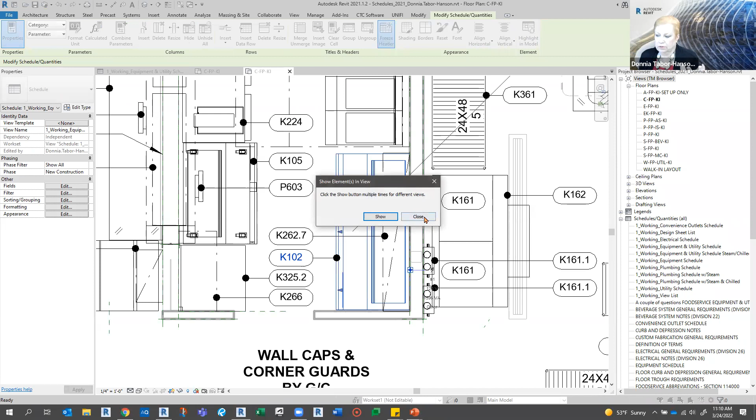That's my 102. Well, let's go see what the other one is by coming over here and picking this, highlight in model again. Goes over here, says, well, that's not a 102, that's a 103. Okay, great. So let's just type in here and say you are a 103. Problem fixed. And when we go back to the schedule and back to the sorting and grouping tab, and we do not itemize every instance, I now have a 102 and a 103 right here and here, and they're both showing up.

So that one is one that gets people, it's like, I put the information in there, but it's not showing up. Well, why is it not showing up? If there's conflicting information, and the fields are in here, and they are being sorted by the item. It's our item CFA number. It's our custom one for our chains. So they're being sorted by that type item number.

And yeah, if you've got conflicting information from that point on, you can put all of them in there as a K102, all of them go blank. That's when you have conflicting information, is when there are different things in there that conflict under that sorting there.

All right, what was my next? Oh, getting something either into or out of a schedule. When say it's not showing up in the schedule, or how do I get this out of the schedule? Well, that's when you use, oh, let me go back, wrong one. This tab. Okay. I'm going to go down here to this one. I've set something up here. So here I've got some things in the schedule that I don't need. So how do you get them out? Or how do you put something in? That's when you want to look at your filter tab. Your filter tab is what puts things in or out.

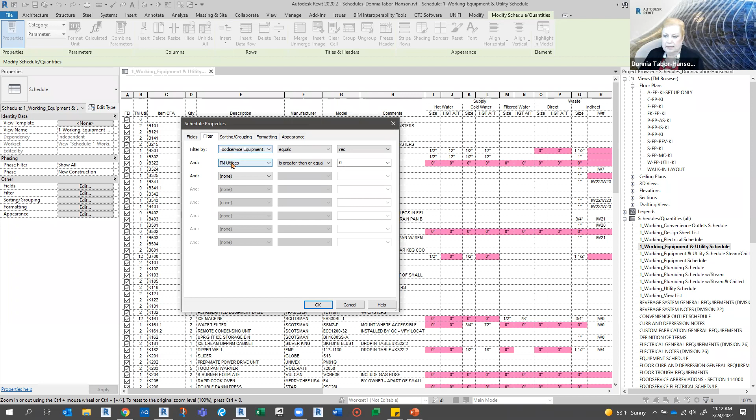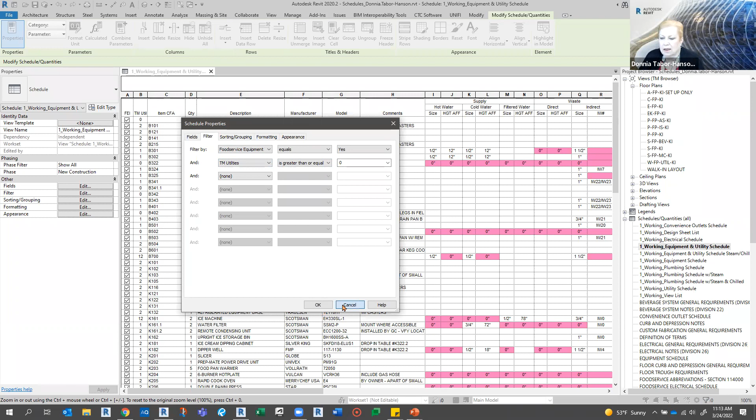And this one says if the food service equipment identifier, again, we're working in this, and yours could be whatever filter you have. But if that equals yes, and TM utilities, which we talked about, watch how much this one parameter can do. That was my workhorse parameter. And if it's equal to or greater than 0, then put it in here. Well, somebody put a duplex receptacle with the TM utilities of 0 and checked it. So it's got both of these in there. It's not supposed to have either.

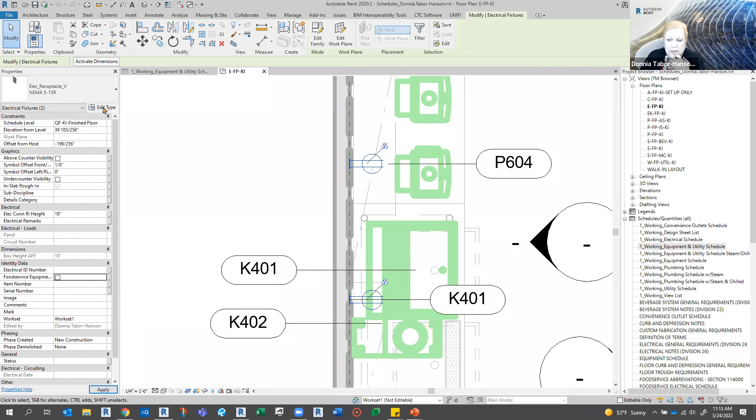Now I could either uncheck it or take the 0 out, but I'm going to go ahead and highlight in model and have it open it up, because I'm going to get them all at once. And it's got this, so I can right click and say select all instances in entire project. You do not need to show up in the equipment schedule. And where's your TM utilities? It should be a type. Why it got put to that, I don't know. But it's a 0. No, it's blank. So let's take it out of there. And that will remove it from a schedule. So you can use your filters to either put things in or take things out of your schedules.

Those are the 3 things that come up more than about anything else for me. And I answer those, especially those last 2, a couple times a month.

Okay, so there's my problem, children. Let's get into some things to make them work for us. We have working versus print schedules. Now, our working schedules, they're the ones that show up at the top of our list of schedules. They're the ones I want you to do your work in.

They're the ones I want you to go edit the information in. They're the ones I want you to go check and make sure everything is filled out, because whatever you do in there is reflected in the print schedules. And the print schedules are the ones that go on the sheets. So the working schedules are just for us. They can show all the information that I need.

Some of your filtered items, like my TM utilities, can be hidden in print, but they'll show up in working, like I showed you with that duplex. Yeah, so some of them may not have a print version. Some of my working schedules may just be for me. Case in point, I have a blog post, and I'm going to put the link to this blog post in our chat. I had a blog post recently about schedules and how to clean up your file.

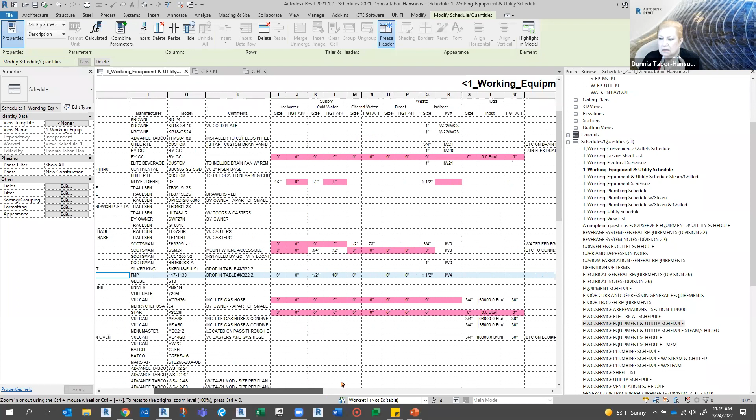So let's take a look at that over here. You can see that I've already got some combinations going on. These are the headers down here in this row. These have been combined here. Let me just copy this out. If I take this and say ungroup it, you see that goes back up there. If I take these two and join them, then I have the option of saying group. And I can put that in there.

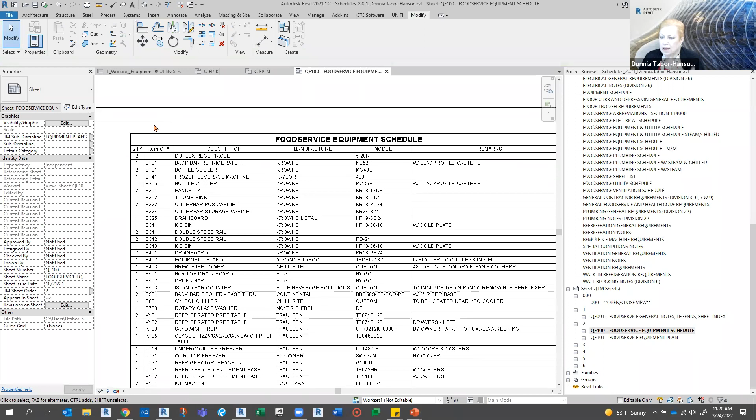I even grouped some groups and put another header on top of that, saying this is my supply and this is my waste. So you can even group or ungroup the headers. To group something that's not grouped, I would just select these and say group, and then you can type in whatever header you want. And it does show up on the prints. Let me go get, and I do pick the one that's not got groups on it. Let me go to my plumbing schedules.

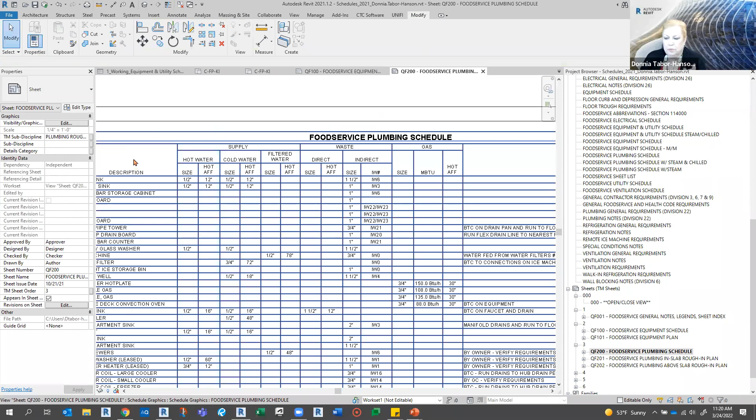When you get to a point, Donnia, we have a question. Okay, so here is the print version of that, and you can see it does make it look neater, so you can define what's where and how things are going. Okay. Do I assign view templates to schedules? Man, I started doing that and got in trouble. It seemed more trouble than it was worth, but yeah, you can make a view template.

And if you want to lock it down, it's harder for some people to figure out how to get to it. But I started doing that and realized that most of my guys don't touch my schedules that are in our templates. And if they need to and they do something wrong, the way we get it back is I'll delete the schedule out of here. When I create a template, I create a file called to steal from. So I've got a file to steal from, and I can insert my schedules from there by using insert from file.

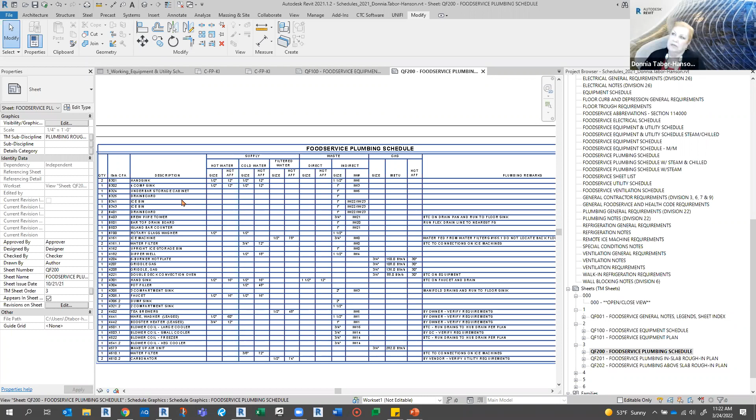Or I can transfer project standards for some things from that project. My to steal from project is something that's good. If they screw up a schedule, I can just go get it and bring it back in. So that's how I work with that. But yeah, I tried the view templates and it was more trouble than it was worth, even for me. I would forget, and it's like, oh, it's got a view template, I gotta take that off so I can edit it. So I just found it was more hassle than it was worth for me.

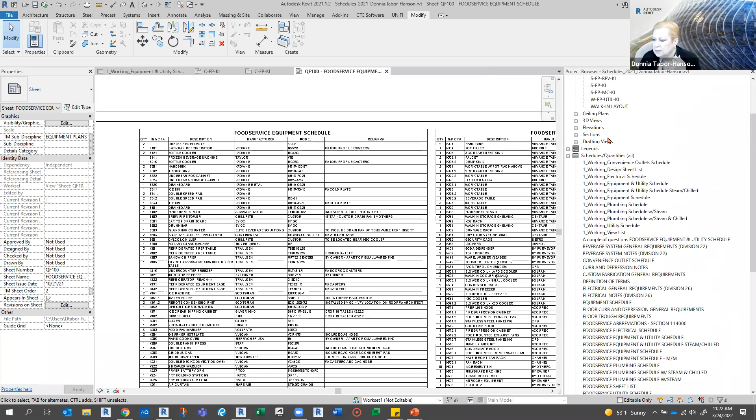But you may find that if you want to lock them down, that would be the way to do it, is put a view template on it. And just to show you where that would be, since it was mentioned, let's go back here to this one. Right here is view template. I even deleted them out of here, but you can just say, where's my create new? What am I in?

View template, none. I don't have a new in here. Oh, now I'm confused. I'll tell you what, I'm going to come back to that and post it in the chat, because I'm like, okay, where did it go? Because I should be able to do this. I do it with architectural, nothing. Do with all, nothing. I don't have a new here. I'll come back to that. I know I've had them, but I just can't get it right now. So I will come back to it. I'm not going to let it slow us down today. But thank you for asking.

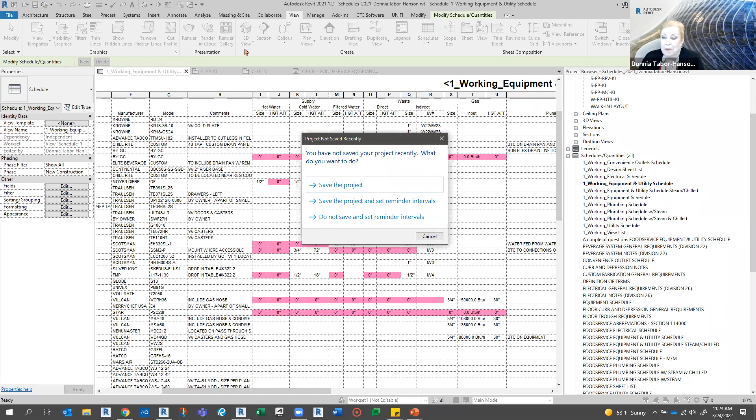David offered up, I think, a tip on that one. That is only to assign one. View tab on ribbon to create. Oh, okay. Yeah, well, that makes sense. And I didn't realize you couldn't do it here, because it looked like you want to do it here. You do others like that. But yeah, when you go here, you see, I went straight to view templates. You can go in and the dialog box comes up and you can get them from here. But see, this just gives me view templates for all.

We can go architectural. See, I'm not seeing schedules here. I'm gonna come back to that. And David, if you want to put a message in there on how it's done, because I can't see it right now. I don't want to waste more time on it at this point. We will get you an answer. We'll take care of that.

Not a problem. I don't mind being stumped. Somebody just got kudos for stumping Donnia, right? So

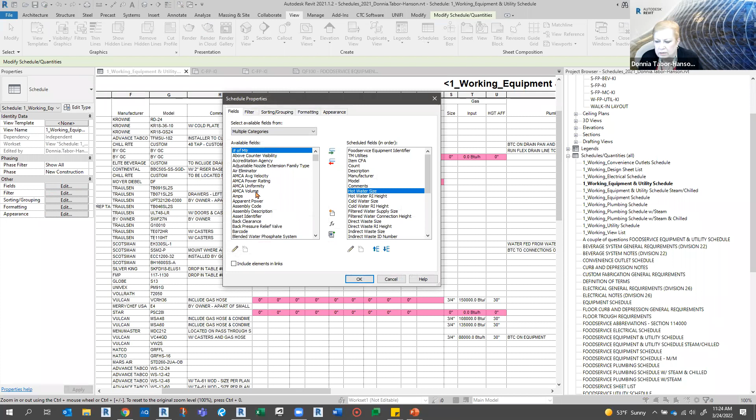Be careful if you add columns after your group, because it will not automatically put them in a group. It will split the group. I showed you how to ungroup and then you can regroup. So your grouping will have to be redone if you do add a column in between. And just to show you how that is done and what happens, if I come in here to fields and go somewhere in here and I'm going to add just anything and put it in there, and see, it splits.

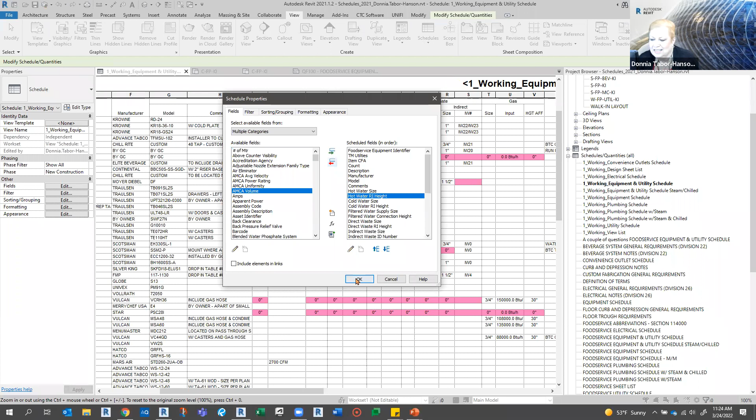So if I go back and take out AMCA volume, and take it out, I'm still grouped there. So if you want to do groups, it's best to have all your columns in to begin with. Okay.

Now, y'all notice some pink boxes in there? Our family templates have more parameters sometimes than are necessary, and often they have zero information or information not filled in. And so we set it up so that when we go into something like here, this says it's hot water, cold water, all of these are zeros. And I'm like, what in the world has the drunk bar? Now you're curious, aren't you?

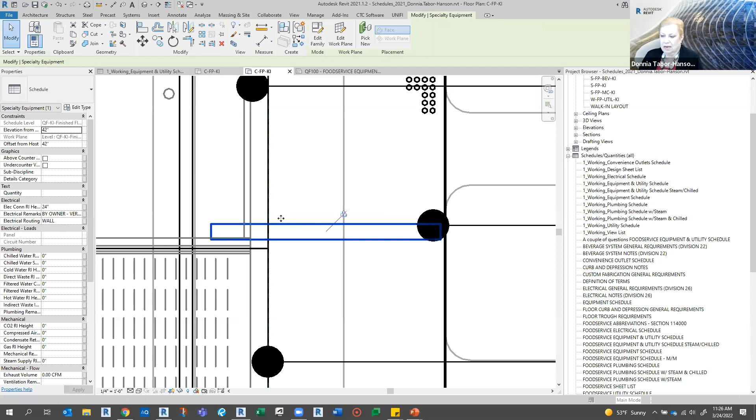Let's go get this and highlight model. I know you want to see what the drunk bar is because this is a restaurant. That's what we do. So the drunk bar is a bar. It is on the top of, this is where the bartenders will set the drinks. And they have a bar here. So the drinks will come out on this side and the glasses will come in on this side. The glasses that are drunk from go on one side of the drunk bar. But I think that's funny. That cracked me up when I found that.

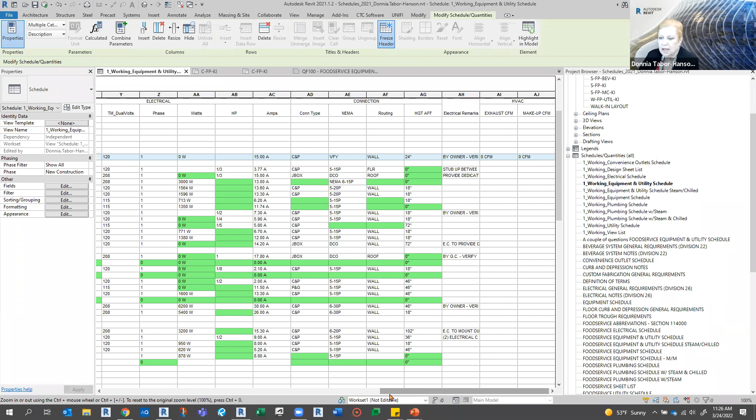So the drunk bar shouldn't have any utilities whatsoever. So apparently the wrong template was used, because if I look, he's got every utility. Somebody has used something else because he's got a 24-inch height with wall verified. This isn't right. There's a family that needs editing. And here this is green. When we have missing information and we want it to show up, that one's got something in it, but it's wrong. It's got a 0 in it.

We have done what is known as conditional formatting for highlighting zeros and blanks. Our zeros and blanks are things where we want to make sure, like you're missing information here or something's not right, so that it prompts our team members to go in and look for those. It especially comes in handy when you've got indirect waste and you need an indirect waste number to show up.

So if a blank is there, the conditional formatting is done under format. And I'll just use that one as an example. Let's go down and get indirect waste number. Conditional formatting is done here. The conditional formatting for this one: if indirect waste is equal to blank, color it pink. So you just pick your own color. You set your own formatting and set it up so that it highlights in there.

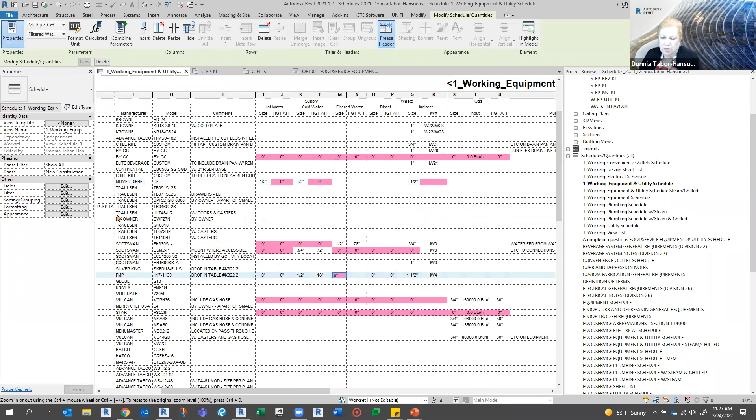And if it should have some information, like if this says 0, well, the conditional formatting for those would be, I'm picking one of these sizes that have an inch mark, if this equals 0, then put it pink. In the electrical, we choose green for missing information, because our view templates are set up so that anything using that TM utilities, 1 is plumbing, 2 is electrical, 3 is mechanical, which is the blue.

So some things will have plumbing and electrical; their TM utilities would have a 1 and a 2, such as this ice machine right here. It has a 1 and a 2. So it goes into both schedules, because our electrical schedule says TM utilities contains 2. So we also put the same colors in here as we do in our working views to let people know if it's green, put electrical with it.

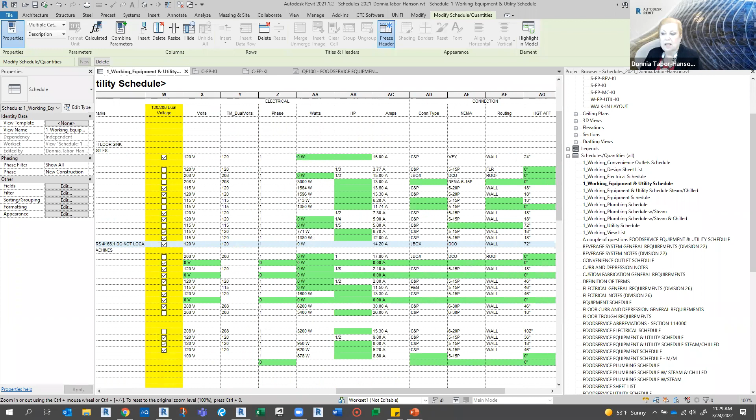And this is also to let you know you either got missing information or there's too much information in that family, which some of it should have been moved out. So that's how you can use conditional formatting to get things to prompt you to fill out information.

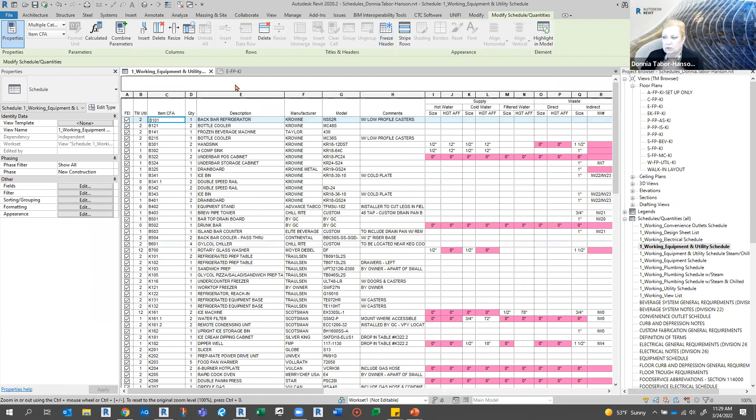All right, now highlighting rows or columns. In 2020 and before, there was a stripe rows. It was so simple. I will pop over here. I was in 2021, now I'm in 2020. If you wanted to stripe your rows, you just had it right there. Stripe your rows. And it automatically has the stripes. Every other row has a stripe to it.

In 2021, there is no stripe rows. They took it away. No, they put it under your appearance because they gave you a little more control. So in 2021, those options have been removed from where it was, but it's been replaced inside the dialog box under the formatting tab. Did I say formatting tab? I think it's appearance tab. It's under the appearance tab. Of course, I got that wrong. So you can tell it to stripe rows, and then you can choose your colors.

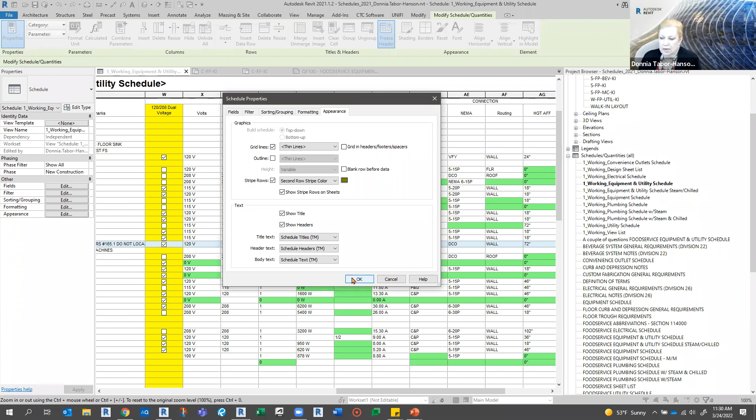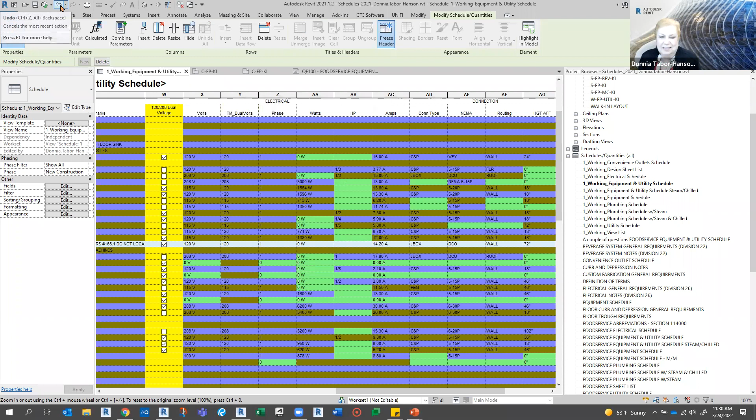And I'm going to say purple, and then I can pick the second row and make it, I don't know, some ugly green. When I have conditional formatting, my conditional formatting stays. That's ugly. Conditional formatting overrides anything when you do something like that for your stripe rows. Yeah, let's get that out of there.

But if you want to do the colors, I'm waiting for them to come out where we can stripe like 5 rows at a time, because it has been studied that the human eye can follow a row of 5 and keep your space, whether you're top, middle, next to the top, next to the bottom, and follow that line better. That's why a lot of times when you see some charts, they'll do it in groups of 5 colorings. I'm waiting for that.

All right. Now, there is a way to highlight one row at a time and to determine its color. And I found that, and I'm going to show it to you on a web page. I'm not going to do it here, but we're going to look at the steps.

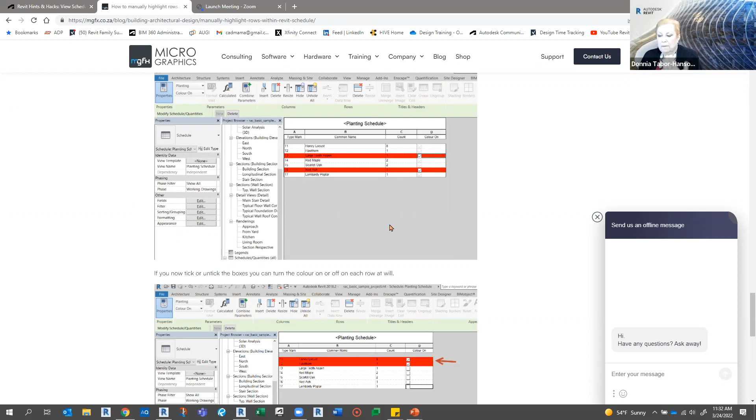So he was doing the same conditional statements that I was doing, but to get it to do the entire row, he has to go into each individual column and say, I want it on this one and this one and this one. Where I was doing it for one column to do this, one column to that. But that is a way, if you want to have colored rows, you can do a colored row.

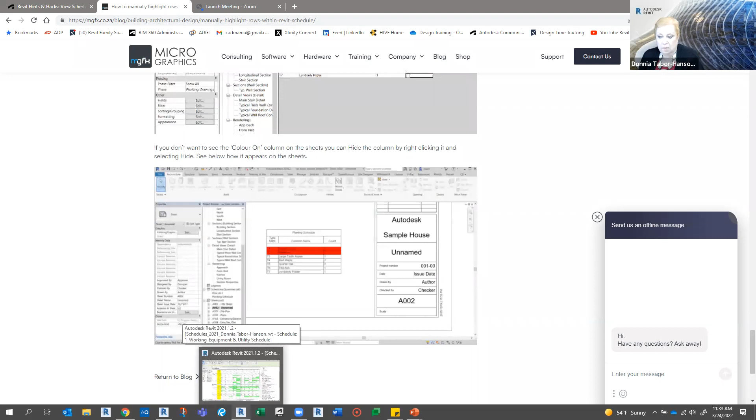Your conditional formatting will eliminate any conditional formatting like I've done with the pinks and stuff. But if you want to do it in your print schedules, you could do it to highlight something. And he shows that it does come out on the schedule. So I didn't want to go through those steps because it was just too easy to come here and point this out and show you that one. Plus, it's something that I won't be doing on mine because we're doing the conditional statements here.

Now, if you want to highlight a header, it's on the contextual menu. So you can come up in here and pick on this, and then you have shading. And if I go to shading there, I could go with all pink. On that one, no, just the header, just the one. So it's just one at a time. If that's what you want to do, you can.

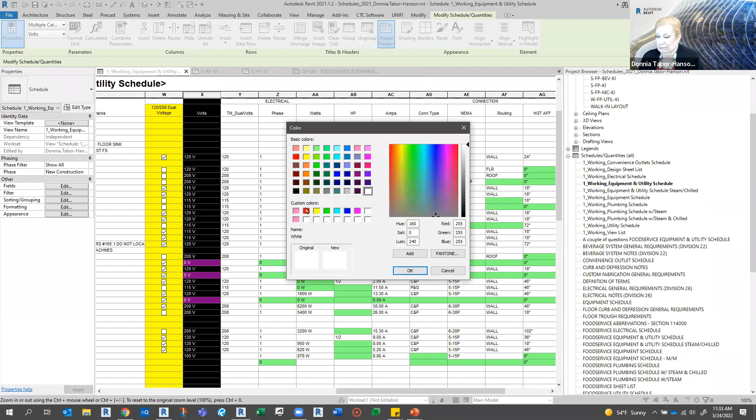If you want to do a column, you can do a column and you can do shading. And if I go do shading in it, notice it did the column but didn't get the header that was combined. But you can, and see, my conditional statements do override this. So you can do columns if you want to. That option is available to you.

Which I keep on doing these things. So yeah, to highlight a column, it's in the contextual menu. Contextual menus meaning when you select something, you look up there, and whatever is in context of what you selected is going to be chosen.

Okay, no zero lengths. Now in my working schedule, I've got all these zeros showing up. You don't want that in your print schedule. So you don't want a zero in your cold water size. We got cold water, but we're just not going to give you any size for it. That's going to be fun.

Since your schedules reside only in projects, we use project parameters for removing zeros. That way I also don't have to edit my shared parameter file. And if you've been following along, you may figure out I don't like anybody editing a shared parameter file. So this was done with project parameters. And we have several things that we can do. We go in there and replace them with something, but it depends on the parameter with the zero as to which project parameter we use, or a blank.

And some of ours that we use have to do with our equipment having electrical and plumbing and such. These are our empty ones, it's called empty amps, and it's project parameters that we assign. They have no value assigned to them whatsoever. They're empty. I have amps, gas, length. Length can cover your size for your gas, size for your hot water, or its rough-in height. They're both lengths. Anything that has an inch mark can be a length. Also can cover phasing, volts, and wattage.

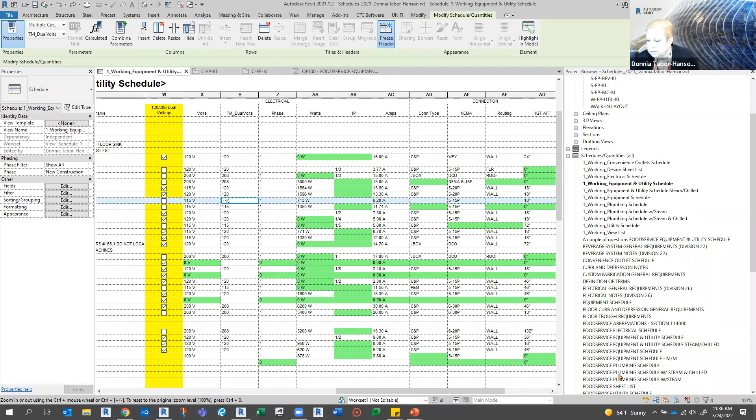So let's go look at how we have accomplished that in our print schedule. So I'm going to go down to, let's see, I've been working on equipment. Did I leave that open? No, of course I wouldn't have done that. Here's my equipment and utility schedule. So in here, it takes a lot of duplication work. For ours, it took a lot of duplication work because we have an equipment and utility schedule, which has all the utilities. And then we have an electrical schedule, and then we have a plumbing schedule.

So I did the utility schedule, and then for the electrical, I would just delete all the plumbing out. Duplicate this utility schedule and delete all the electrical out, and I got my plumbing schedule, because it does take a lot of work and a lot of extra fields in here because we have duplicated our fields.

So here's the hot water size parameter, but here's HW size. When I go look at formatting, hot water size is our parameter. It's hidden, but HW size has a heading of just size right here. But HW size isn't a parameter. If I go here and pick on HW size, it's a calculated value. HW size has to have parameters that are already in the schedule if you're going to use it.

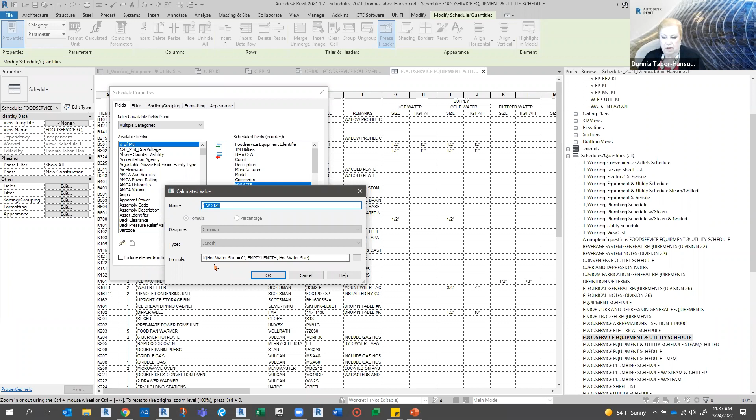So if hot water size equals 0, use empty length. Empty length also has to be in the schedule, hidden field again. Else use hot water size. So if hot water size comes in with 0, it's going to use empty length, and empty length is set to blank. Else, if it's got hot water size, it's going to use hot water size. So therefore, I have eliminated all of those zeros in here.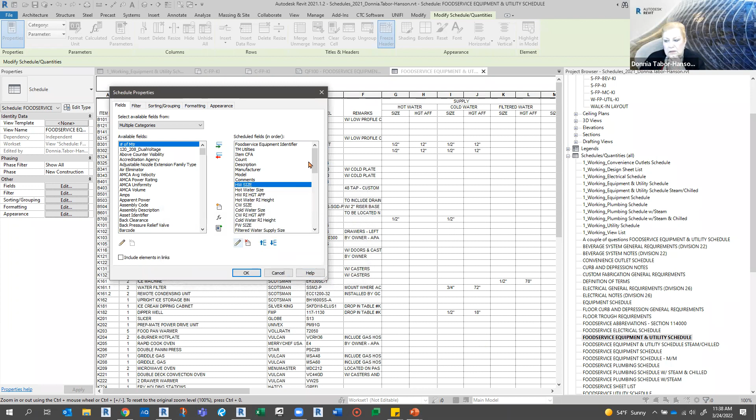So just look down here. Here is all of our empty length. These are set under formatting to be hidden fields. They don't show up, but their values are used to replace any zeros or blank fields so that they don't show up when we don't need them. And it just made it a lot cleaner. Before we did this, there were a lot of zeros still showing up, and if you send that to an MEP guy, they're going to go, what? Red marks everywhere. So to keep the bleeding from happening, we removed all the zeros.

Donnia, when you get a moment, we do have a backlog. Oh, okay. What you got? Let's see. I hope I'm saying it right.

Mylan said, maybe out of topic, but my team needed a fast solution to schedule an electrical fixture family with survey coordinates. What I did was insert a site category family into the electrical lighting to schedule it all fast. It worked, but do you have a more intelligent solution? No, because you're going to need something that has survey information in it, and the electrical doesn't have survey information. So that is the optimal way of doing that. Just nest it in there. That way, everywhere the electric goes, it carries that little survey thing with it. Yes, perfect.

Paul asks, is it possible to get more than one conditional color in a column, such as fire ratings on doors within a door schedule? 30-minute red, 60-minute blue, 120-minute yellow. I don't believe so at this time, because you only have the one condition and I don't have an or in there. If we had an or in there, hey, wish list. Is the Revit team listening?

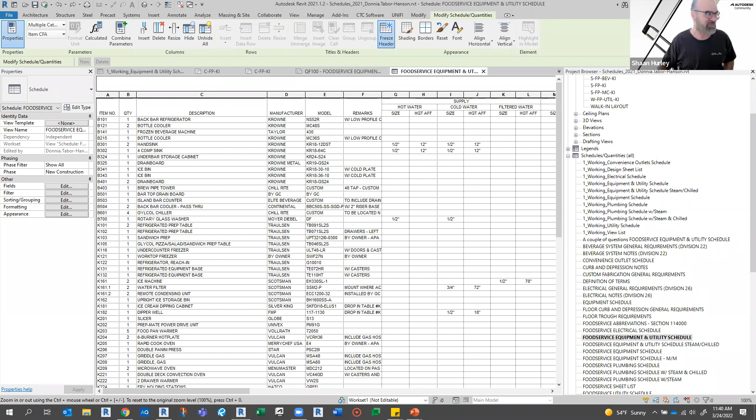Okay, is that it? Yeah, Katie came in with a good one: if you're working on a door schedule and the glazing dimensions are equal to 0, how can all those zeros be hidden, or just those instances? And then she goes, oh, I asked too soon, because that was when you hit that. So yes. Okay, perfect. Thank you.

Okay, I'm looking at my time. Let's drop to a key schedule. I don't know if anybody's ever made a key schedule. This is the simplest thing in the world to do, and it's for when you have something that's going to be repeating. You start a new schedule and you choose the category of key schedule. I've got like 3 notes here, and then we're gonna jump over and do it real quick. Select the schedule keys for the type. We're gonna do a room key schedule, which is typical. Doors are great for key schedules so that you can pick which type of,

What, people are drawing on my things. Can you block them from drawing?

Okay, so doors are great if you want to do the hardware. We're going to have a kick plate, which type of hardware it's going to have. You can do a great key schedule for that also. And after the key schedule is made, you can then add the key schedule to it. And the key name can be hidden if needed.

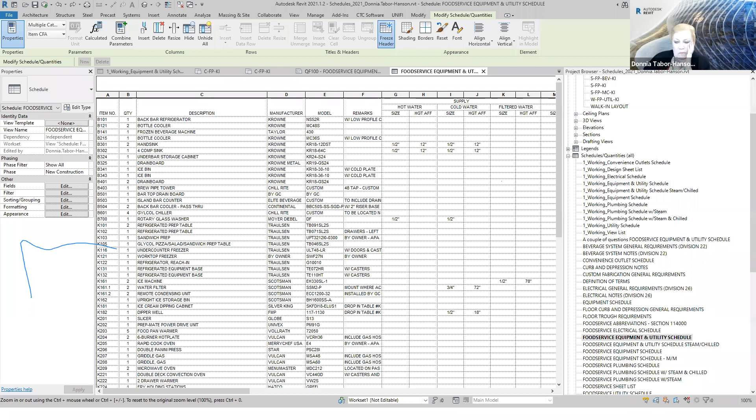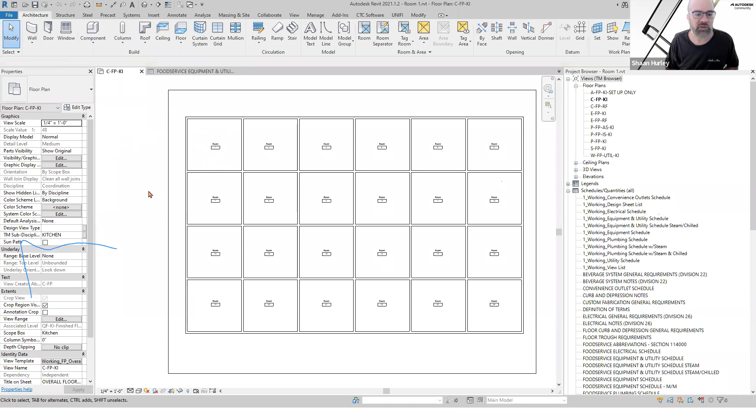We're going to a key schedule. So I'm going to go up, and schedules are under views. And I'm going to say schedule. And when the schedule comes up, it won't let me select this until I go down to something that can have a key schedule, such as rooms. Select key schedule. I'm going to call it room type

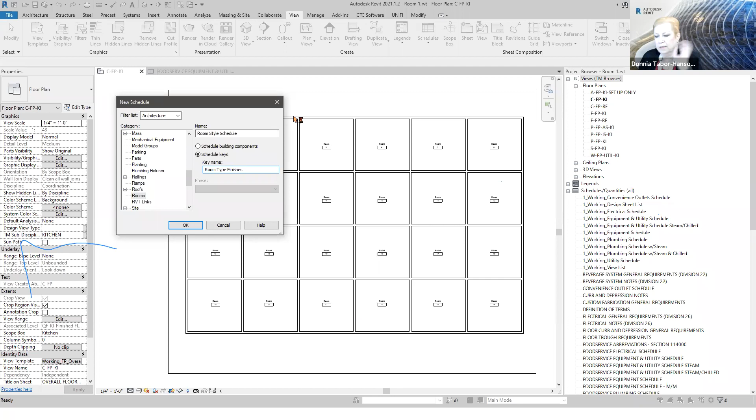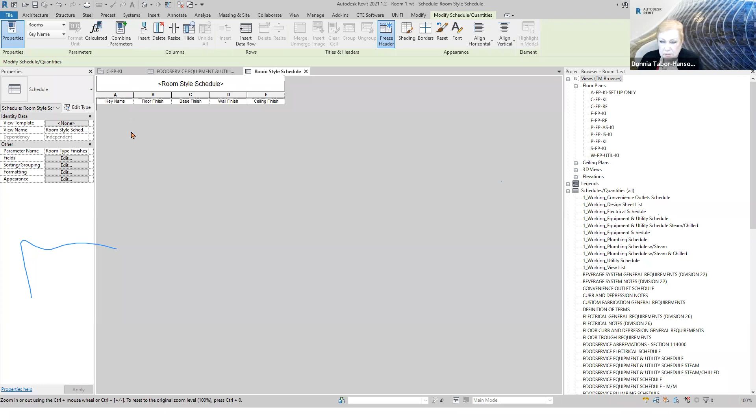finishes. Okay. In here, let's start with a floor. I need a floor finish. Going up, I need a base finish. Next, I would need a wall finish and a ceiling finish. So now I've got a key schedule. And I need to add some rows here so I can fill them out. So I'm going to insert data rows. 1, 2, 3, 4. Let's do 4.

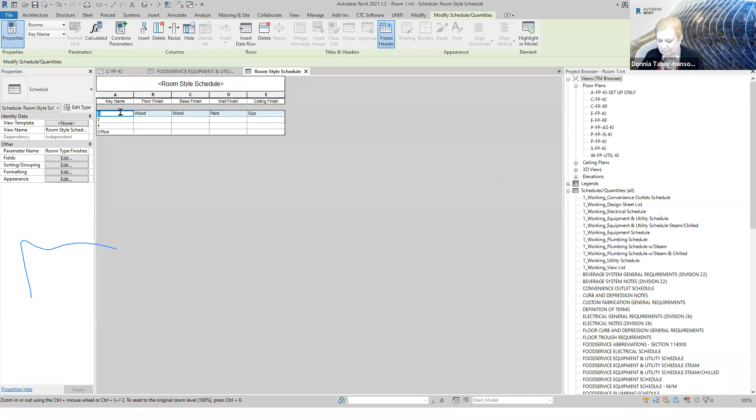And let's say if I'm in an office, I have a wood floor, wood base, paint, and gyp. And that just went to, oh, office went down there. Okay, I'm going to change this to something else. Can't spell. Okay, we're going to leave it. We don't care. We're going to say storage room.

Can they still see? Because all of a sudden I've got Shaun over here, big time. Yeah, you might need to hit share again. I was trying to get rid of the draw thing. I dropped your share out. That's what happens. I broke it. All I have been doing is typing in the schedule, and y'all didn't see me type and misspell.

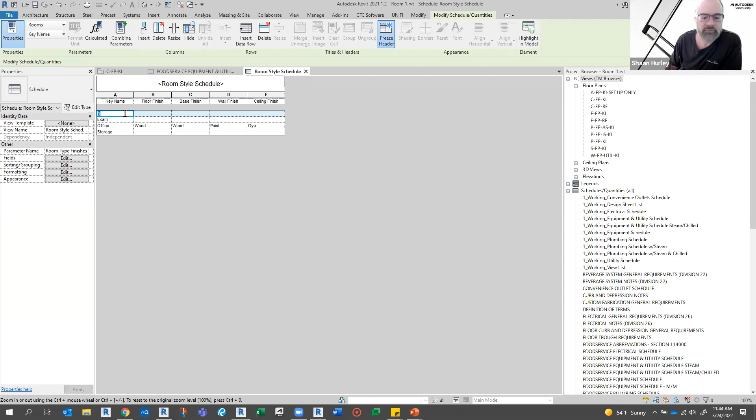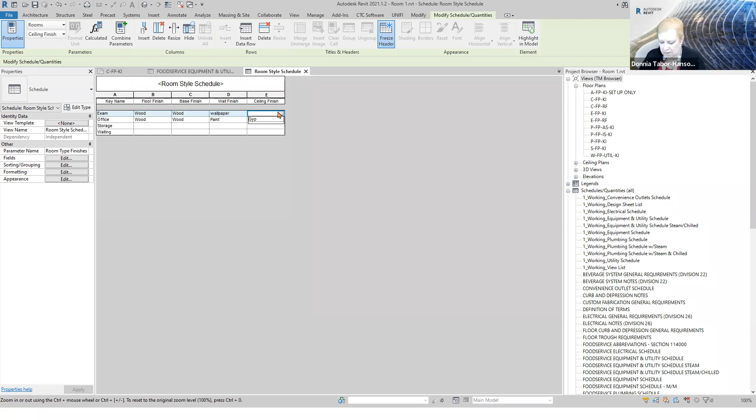I'm leaving it anyway. So I've got an exam room, an office, and a waiting room. We did get rid of the annotation though. Now, the exam room is also going to have wood, and it's going to have wood, but here it's going to have wallpaper. Can't spell. And the ceiling's also going to be gyp.

The storage room will have acoustical. It's going to have paint. It will have vinyl base and tile. Boom. Okay, let's make the exam room with tile and vinyl. But then, once we get them typed in there, you see we can just go pick on and make that wood, make it wallpaper and gyp. So we've got 4 different room types.

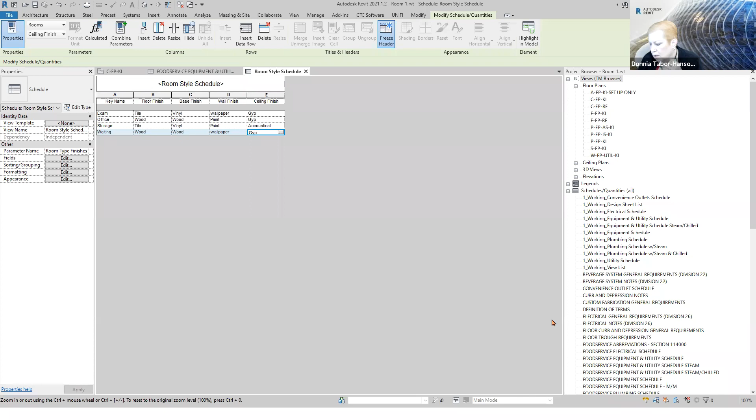So now when I go to my room finish schedule, I can go in here and now I have that room type finishes that I made as a parameter that I can put in here. So I'll put it in and then I can come over here, and this room, I'm not going to fill out all this other stuff. All I have to do is fill out which type of room it is to fill out that schedule. And I can change it at any time and say, you know, you're this or you're that.

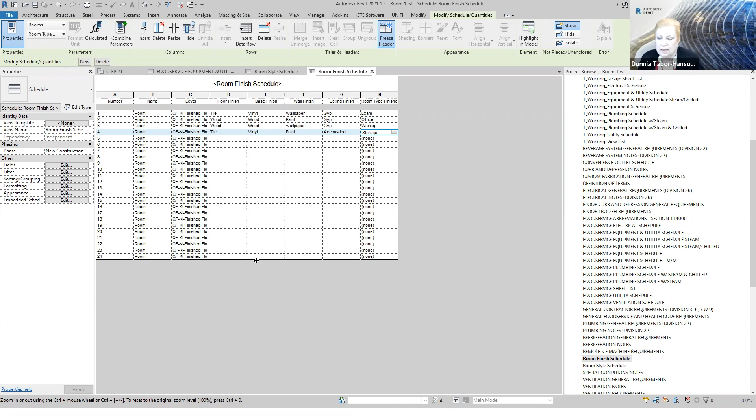So you can see how a key schedule, if filled out, can go in and fill out the other schedules for you. It's a very simple way of getting that in there. And then I can come back in under formatting. I probably don't want to have this one show up, so I'll just hide him. So then I can have my finishes already coming in. Better spelling, all uppercase, you can do all kinds of things better. This is quick. So that's a key schedule. It's a real simple method of doing things. Do we have any questions on this?

Does not appear to be, other than Chris making fun of me blowing away your share screen.

Chris got my back. Okay. Back to, I think we're going to get through everything. I was wondering if I was going to have to blog about this last one instead of just going through it.

Okay, schedule hijacks. Some of the things that we schedule or use schedules for, number one, notes. I love it for notes because I like the way it formats better than using text. I can line things up better, and let me show you a sheet. Let's go. Yeah, I got a lot of schedules. You're going to see why right about here.

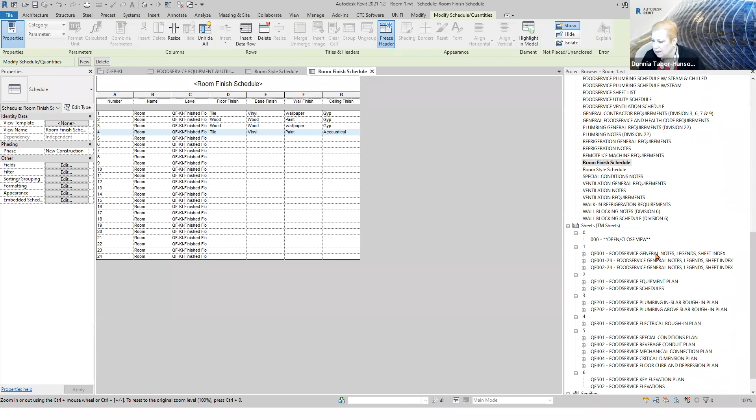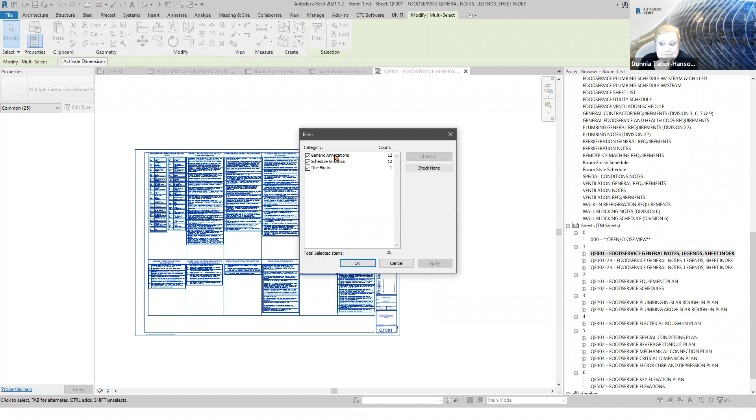This general notes and legends page. If I just do a crossing window here, under my filter, I've got one title block, 12 schedules and 12 generic annotations. I like things nice and tight and clean lines wherever possible.

We have a generic annotation, this is a bonus here, that we can give whatever name it needs to have, and we can give it whatever size it needs to have, and we can line them up here and fill in information. Everything else in here besides these things and the title block are schedules. These are all schedules.

This is great because in a schedule, I can go into my formatting and I can set whether my formatting is going to be left or right, and I can do that easier. I can go into the appearance and set anything I need up in there, the correct text and everything. But I like it because I can take this schedule right here, bring it over here, and break it in half if need be.

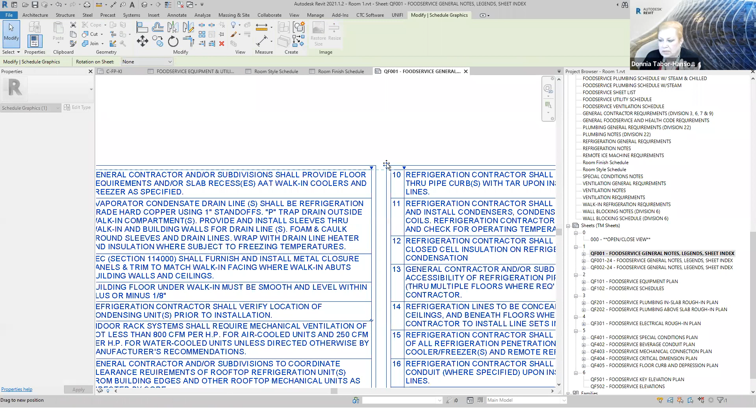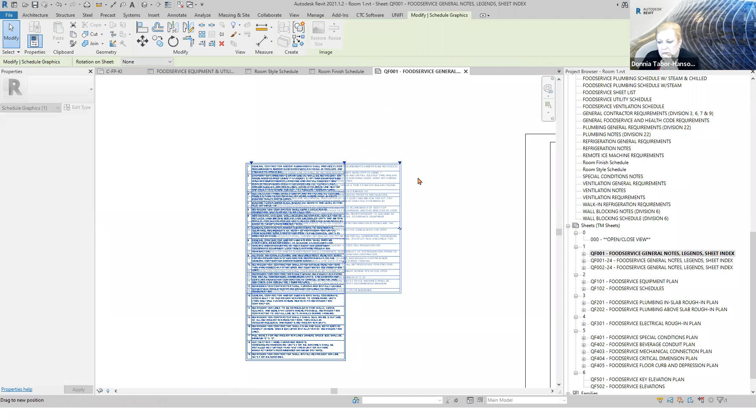People always ask, how do you put it back together? You have to pick on the little move button, and just drop it in the middle. It puts it back together. It's an easy thing, but that one seems to be tricky until you zoom in and get that move thing. But I can also take it and make this wider. This to me works a lot easier than working with text in there.

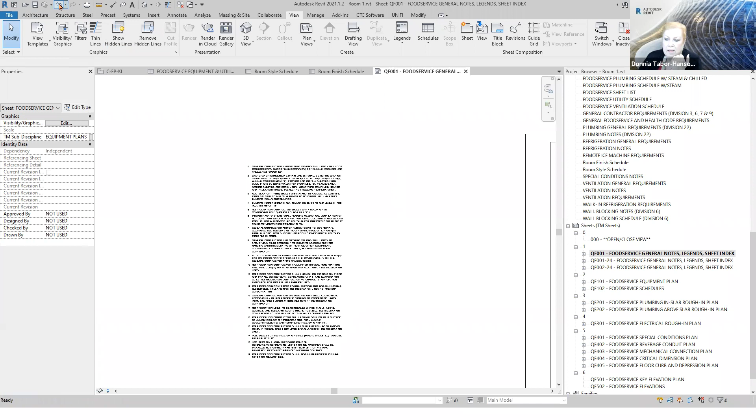So I can go in there and make all of these text and put it back where it goes. The nice one is this one right here. When I open up this schedule, my abbreviations, all I had to do is copy them in here and just set the right justifications. And the beauty of that is I can put it on any project I need.

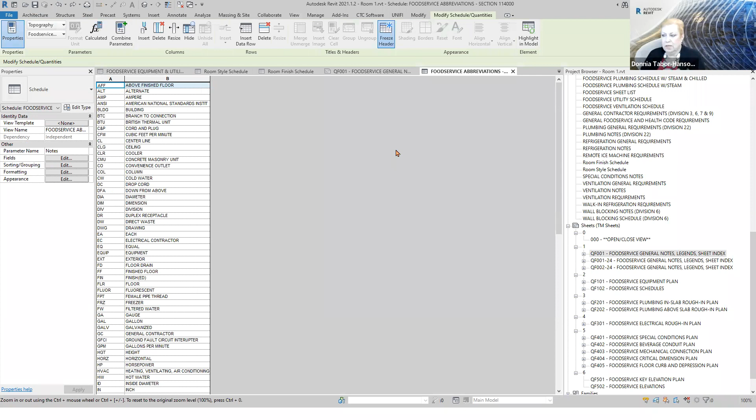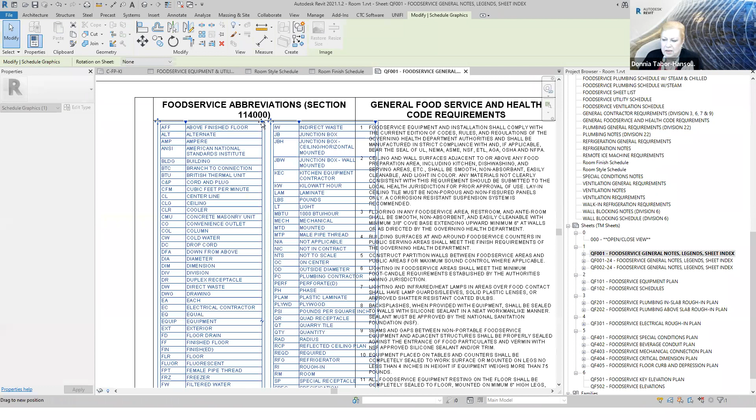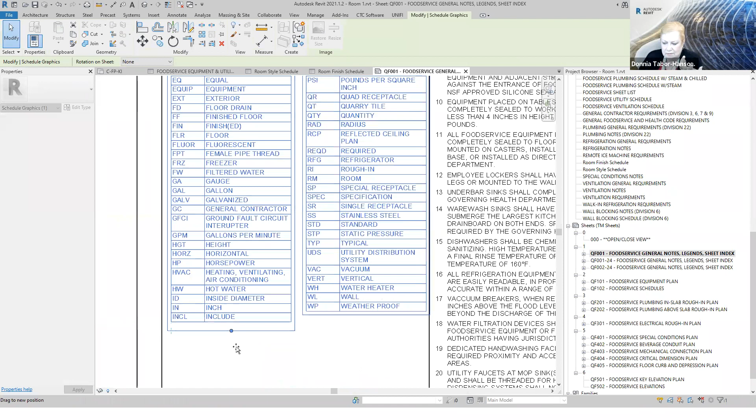And because I can break it up like you can a schedule, which you can't in text, I can make this any size I need to make sure that it fits in. And if you move one, you're going to move the other. I've got it where it fits in where it needs to be just by breaking it. And you can, of course, move these up and down to adjust them, however you need to move them.

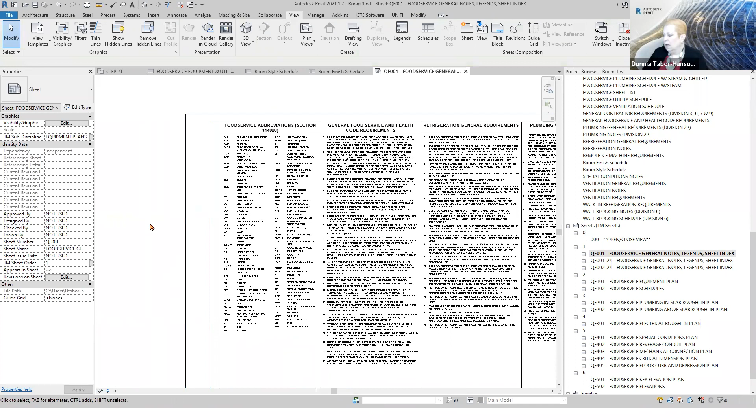That's one of the things I love about schedules, being able to do whatever I need to do with it, to get it either text or to get my working schedules, where it gives me so much information and it gives my team members a lot of feedback. Oh, I'm in a blank project here. It gives my team members a chance to go in and work with those so that they have feedback given to them from the schedule.

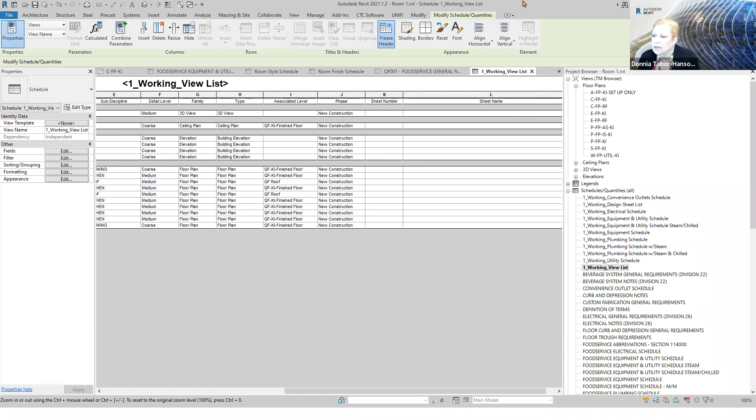I mentioned the view list in my blog post. This is my view list. You can see I've got a lot of things in it, and we've got a minute or two, so I'm gonna go back over it. Working views and such. So if I'm not in a project, let me pop over.

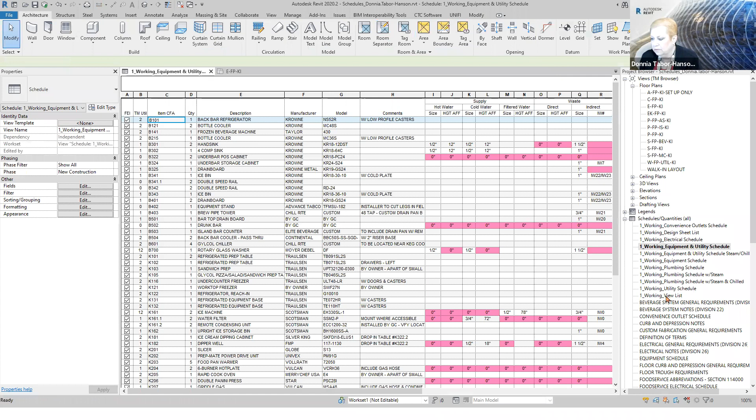We are getting some questions. This is now 2020, and it is in a project. So here's a view list of an active project going on, and you can see there's a lot more in here. We preset some of our views. Our views don't have their names on them; that's going to be on the sheets. We have these set up for our coordination, our electrical, our elevation key, our plumbing above slab or plumbing in slab.

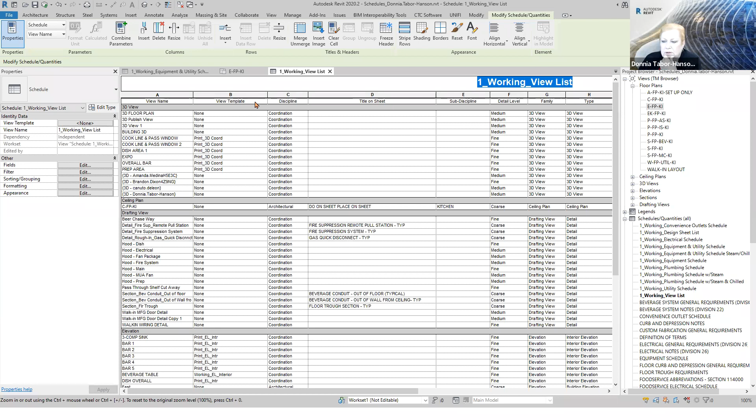So we have a code for these that we give everybody when they start, so they know what these are. But then each of these will have a title on sheet. But it's nice to come in here and go, well, it also has, let's see, it has a view template. Now here comes up something I don't think I even mentioned.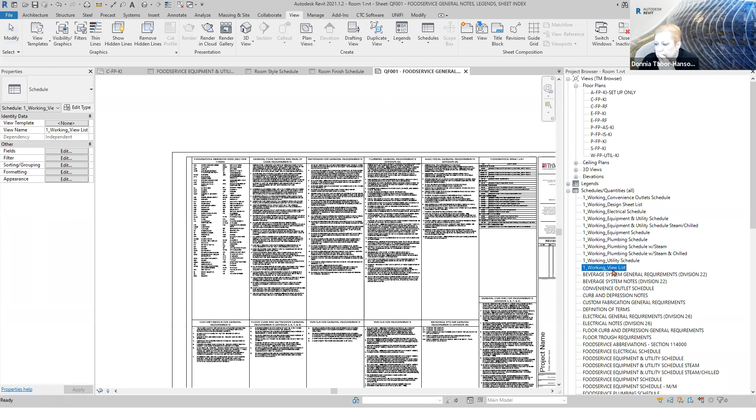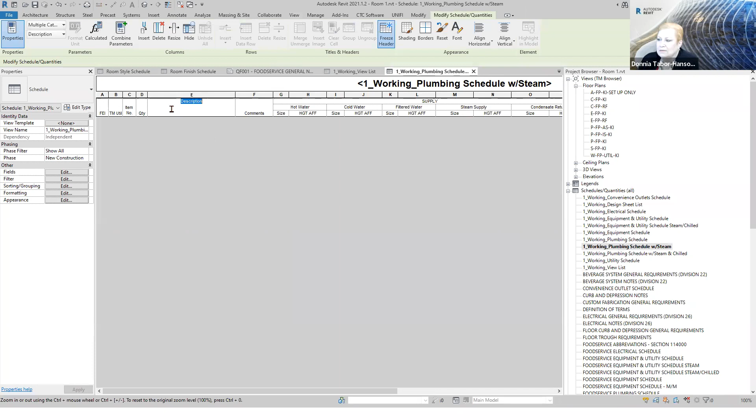Why don't we come in here and... not showing up here? I think it's in here. Give me my working view list over here. I went back to 2021. Where's my locking headers? I didn't mention locking headers. Oh, because I turned the headers off in there. Where's locking headers? Give me a schedule with something in it.

Where's Kevin? You know where it is? Kevin's gonna pop in and tell me. I don't know, I can't find locking headers. You should be able to lock your headers. So you go in here, you should be able to lock these headers, and I'm not seeing it.

Epic fail. We have freeze headers. Where's freeze headers then? Am I missing it? Right click. Freeze header. There it is. There it is. I'm like, I should know right click better. Okay.

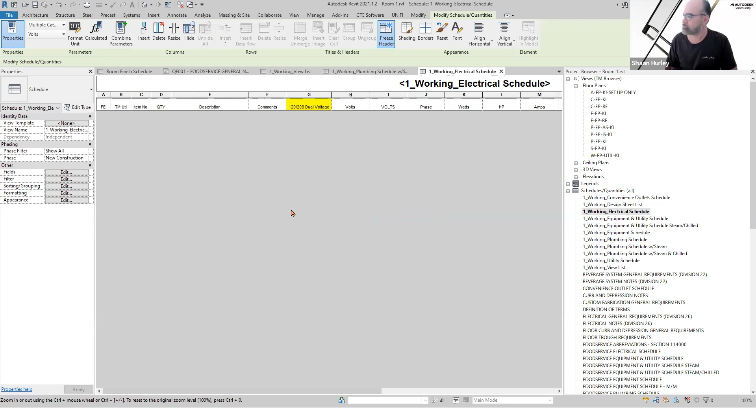What kind of schedule is the abbreviation? Oh, that's an excellent question. On the ones that I hijack, what kind of schedules are those? When I go create those, if I go here and say edit fields, you can't really get back to where it starts, can you? Okay, I use mass. I use mass a lot.

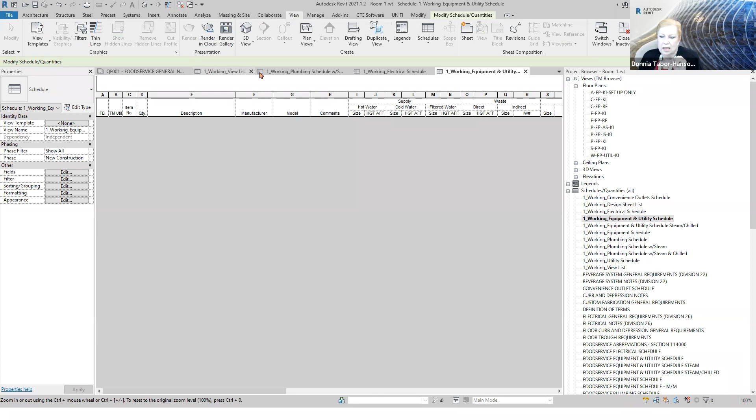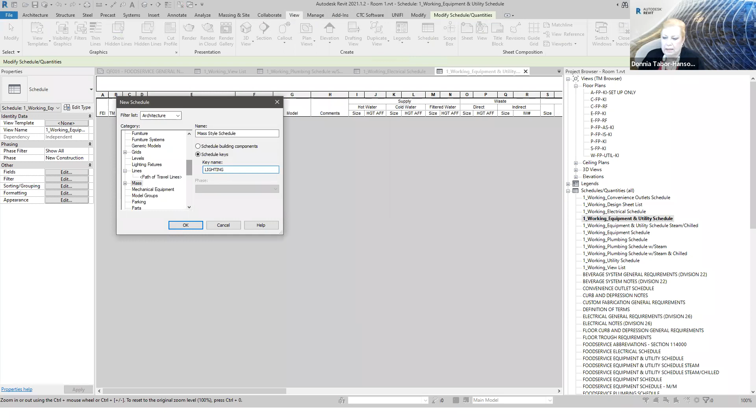If I want to start a schedule, and I'm going to make it a note schedule, I'll come down here to mass, because we don't use mass. And I can make it a key schedule, and I can call it, if it's electrical or plumbing, maybe it's going to be lighting. And it's got a key name, and then I can go, give me note. So I got a key name and a note.

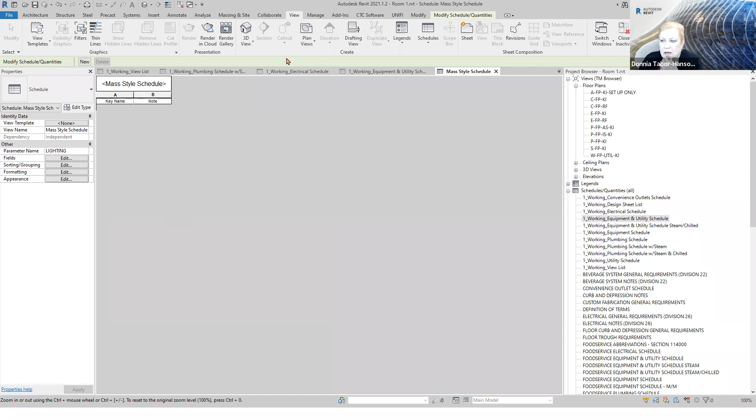Okay. And then I can come out here. Let me get that back up, right? I can insert data rows and put in whatever I want. Give it the numbers. And the nicest thing about this, as opposed to text, is I can mix letters and numbers. I can have an A and an A1 and A2. You can't do that when you use text. So I use a mass schedule, and then I can get rid of the header.

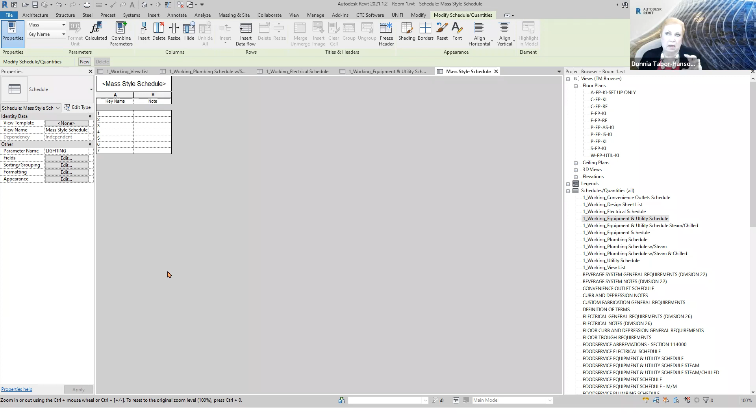I can get rid of the blank row. I can name it whatever I want. And my key schedule for my abbreviation schedule was done exactly the same way, just putting abbreviations in here and whatever the abbreviation stood for in this row. So that's how I do that. It's a quick little thing. And I don't know why I didn't think about putting that in here. Thanks for the question.

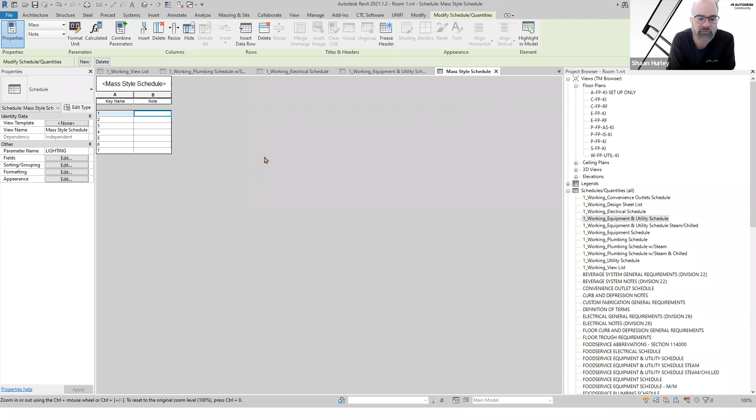Hey, Donnia, yeah. You could have just used the new Alexa feature in Revit and just said, freeze header, Revit, freeze header. Yeah, that works as well as Alexa take down Christmas tree. I know. So yeah, that's good, guys. That's good. Yeah, this is fun. I like the interaction here.

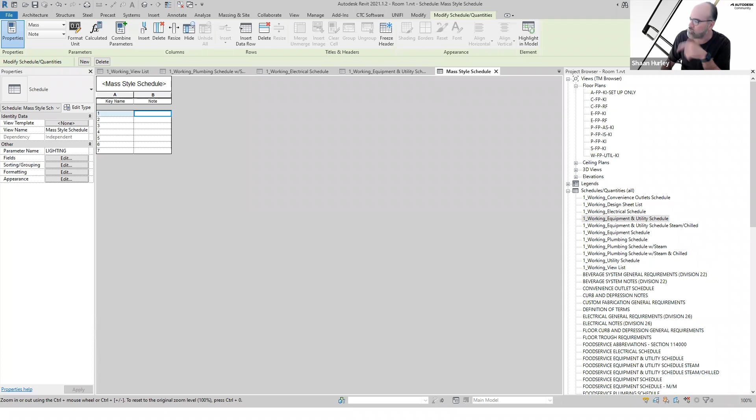Anything else? Anything else, guys? Any other questions? There is, well, I don't know if you got the one. Thanks for noticing my forward-looking statement, David.

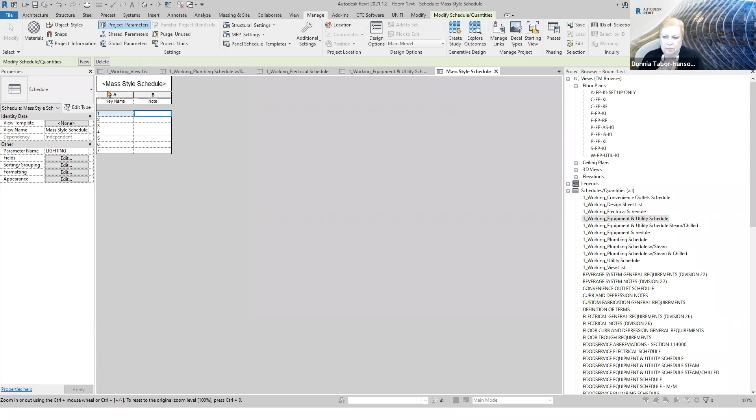Katie said I was unable to get the 0-inch to hide in my door schedules. Any tips? Okay, I told you it was a project parameter, so let's go ahead and look at the project parameters. Under the Manage tab, I have project parameters, and the one you want is an empty length. And when I modify that, you do have to tell the empty length it's an instance. It's under other, it's a length, and then you have to assign it under the project.

Very good, I didn't cover that, and I didn't think about covering that. But you do have to assign it, so you would have to assign it to doors, but you can assign that empty length to anything. When we talked about parameters last time, I said project parameters are great because you can assign them to multiple things at once, where a shared parameter goes into a family and is assigned individually, but a project parameter can be assigned to various categories. So you can assign this empty length to anything you're using in a schedule that you want to take zeros out of.

That should answer that one. That's great. I like this.

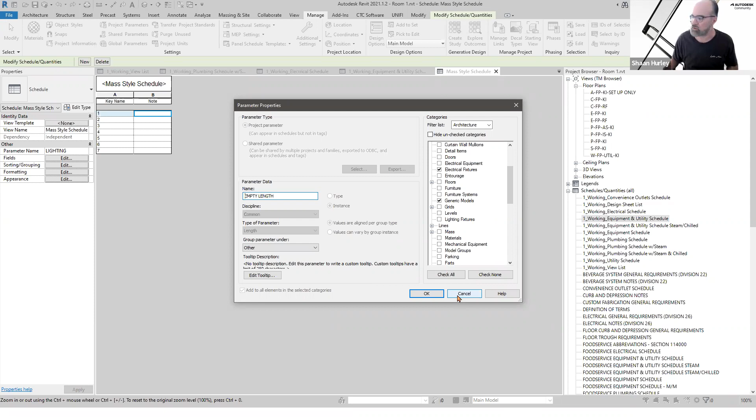We're getting near time, but we do have Elaine with: do you use key schedules to populate door schedules? No. Well, yes, I do for things like hardware. Not for just all doors, but for your hardware, anything like that, that you can put in a list and say, if it's this type of door, it always has this. That's what that room was. If it's an office, it always has this. So that's your key to key schedules.

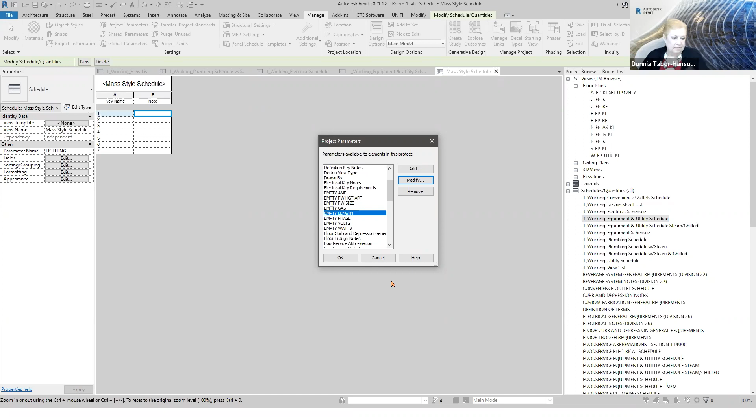I didn't want to say it. That's your definition of a key schedule: if it's this, it always has these things. That's what a key does. It keys up these things for whatever your category is that you need. So if it's door hardware, floor finishing, or your finishes in your rooms, anything that goes on, every time it's one of those, it has this. That's when you use a key schedule.

Okay, this is fun. It's always entertaining. Y'all can stump me and I can stump myself, and yet we keep on going and having fun. And we basically got all of them answered, I think. Fantastic. What else we got?

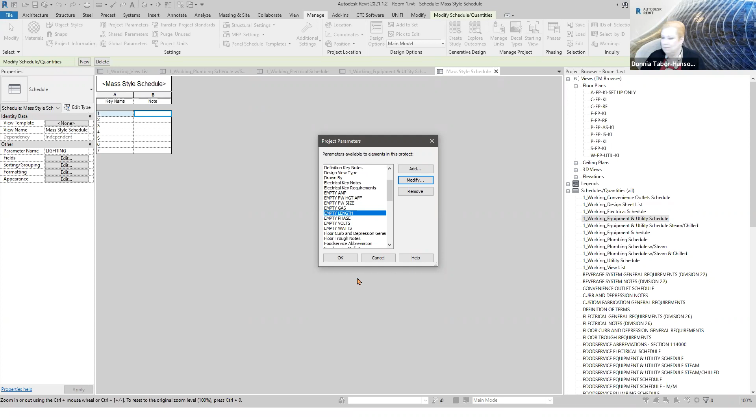The next thing going on here, let's see, notes and abbreviations. Yeah, check my blog post on how to use this schedule to clean out unused views, because you go in there, find what they are, and you're out. We've done Q&A.